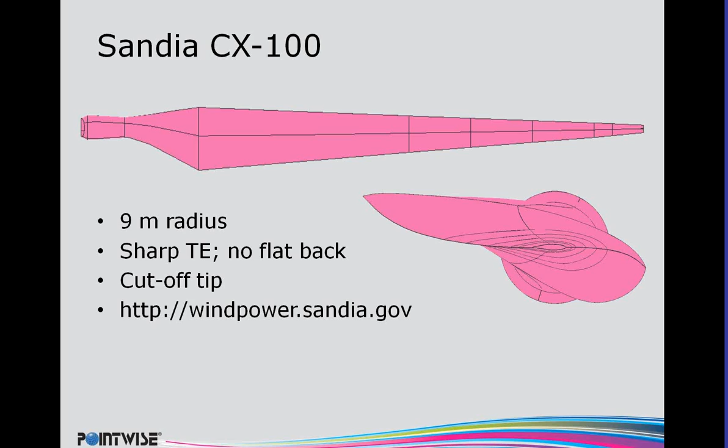So at this point, I'm going to give a little bit of a background on why a CFD engineer would be concerned about meshing on a horizontal axis wind turbine blade. So horizontal axis wind turbines, as we know, generate power through lift. And so efficient designs are going to need to have a low drag. The idea is to get an efficient design, we want to maximize the lift over drag ratio. So we need to look at what factors are affecting the drag on the blade. And so the two predominant aerodynamic drag components in this type of analysis happen in the viscous region near walls in the boundary layer, and also in the wake, where we have some sort of deficit in the velocity. So it makes sense that resolving the boundary layer and the wake reliably and accurately are kind of the key to a successful analysis. So this begs the question, what do I need to do in terms of my mesh to help achieve this?

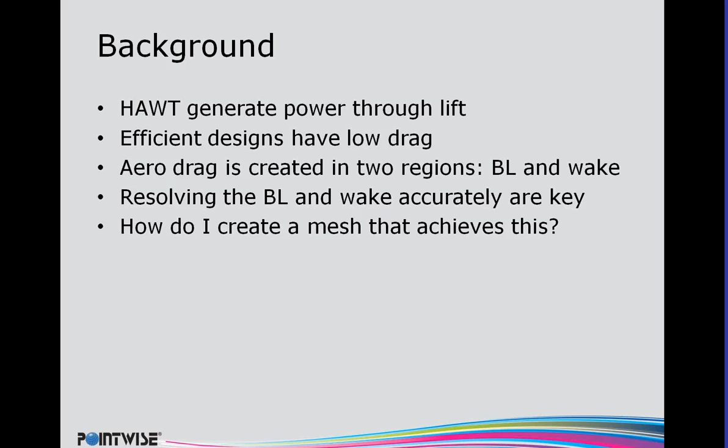So I'm going to back up a little bit and just talk about meshing in general. We can think about meshing from two ends of the spectrum. We have the more traditional structured meshing approach, where it's 100% hex cells, body aligned, point match blocks. It's fairly well known, and over many years of work they've been recognized as generally providing the highest fidelity solutions, but they tend to be much more time intensive.

But on the right, we have the unstructured approach, at the other end of the spectrum, requiring very little time using modern meshing techniques. In this case of the CX100, if we were just doing a fully unstructured mesh, it would literally take just a few minutes to make it. But the trade-off is definitely some sacrifice in the fidelity of the calculations we're doing.

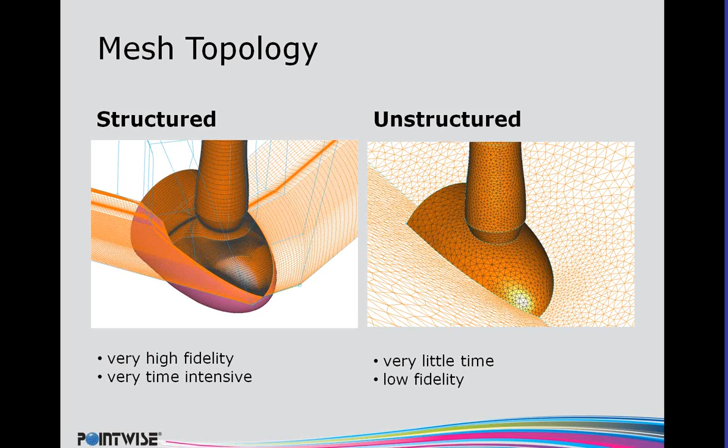So you may have heard this, and I just mentioned before about structured meshes being very high fidelity, and so you may wonder, what is it about a structured mesh that makes it so desirable? I think I can break this down into two key concepts. One is simply point efficiency, maybe the most obvious. I have a very simple problem here, just a back step, showing you the differences.

You can see in the case of the structured mesh, I have about half as many elements, half as many cells as the equivalent Delaunay unstructured mesh. In both these cases we have the same number of points on the boundary, I just generated the interior with a different method. This is further exacerbated in 3D, where that ratio, as opposed to being 2 to 1, is more along the lines of about 5 or 6 to 1. So you get considerably higher cell count.

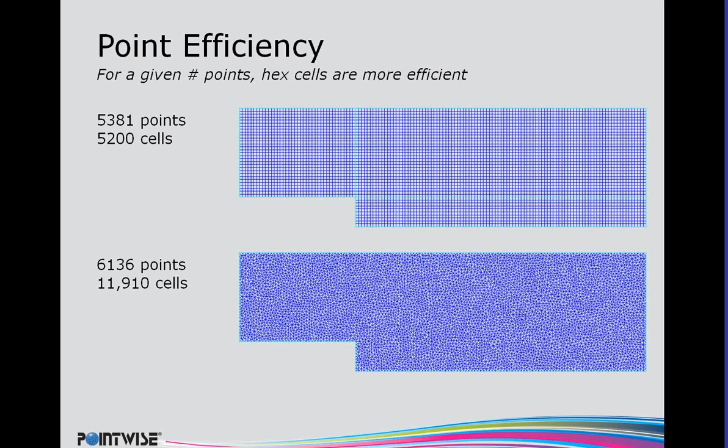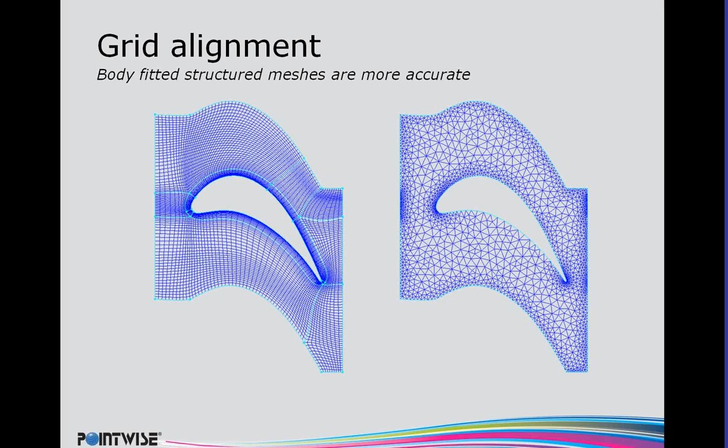Now the second point that makes structured meshing so attractive is this notion of body-fitted structured meshes, grid alignment, aligning the grid with your flow, giving me higher accuracy. That's just kind of a talky way of explaining it. So what is it about this aligning the mesh with the flow that gives us more accuracy?

Just a very simple comparison between the quad cell, the structured mesh on the left, versus the tri-cell, the unstructured mesh on the right. This is simply showing you a flat plate flow. We have no gradients in the streamline direction, and the gradient is strictly in the normal direction. So what I'm looking at here is the Taylor series expansion about the cell center from the cell center to the face.

Why is that? Well, if you look at cell-centered finite volume methods, this is the numerical technique we use to get the values to the face, because we have to do an integration around the faces of the cell to accumulate the values at the cell center. This is a very important step. In the case of the structured mesh, where the faces are aligned with the flow gradients, the truncation error terms in that expansion essentially cancel out, so we have a really high approximation from the cell center to the face.

But not so in the case of the triangle, where there's a remaining delta between the location of that cell center and the face center. It may vary from solver to solver, but the general concept still applies no matter whether it's a cell-centered or a node-centered or maybe some FEA-based algorithm.

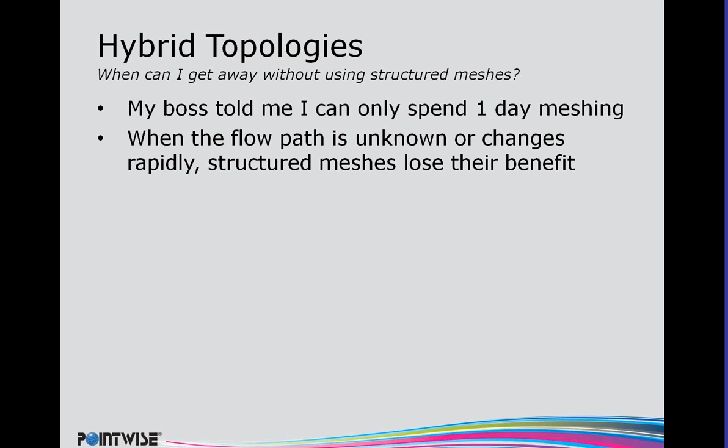So maybe getting back to the discussion about flow alignment, when the flow path is unknown or changes rapidly, in the case of maybe some sort of transient simulation, it would make sense that structured meshes definitely lose a benefit. If we don't know the flow path a priori, it's pretty difficult for us to align the grid lines with the flow.

Another big benefit for unstructured meshes is that they provide a lot more control or flexibility for localized clustering, and we can look at one particular area, pack in a bunch of cells, and that clustering does not affect far away areas. Whereas for a structured mesh, I may apply some localized clustering, but due to the nature of a structured mesh, that resolution control is going to possibly propagate into an area that we simply don't need it.

So getting back to the reason for this webinar today, hybrid meshes are just a good compromise between effort and accuracy. So what we want to do is put a hex, or in the case maybe a prism mesh, where we take a triangulated surface and extrude layers.

Again, definitely better than purely tet mesh. So we want to put these prism or hex regions, zones, in the important regions, such as boundary layers and wakes.

And in the case I'm going to show today, for compressible flows, we all know resolving shocks is important. And for multi-phase calculations concerned with free surfaces, we want to resolve that sharp interface. It's fairly well known that trying to get hex type cells in that region is important. We just put unstructured elsewhere, for simplicity of meshing, away from the flow gradients where it's maybe not affecting the accuracy of what we're interested in as much.

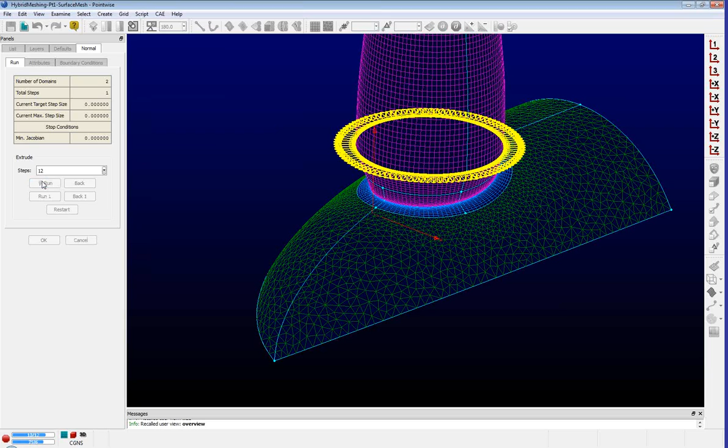So what he's doing, like I mentioned, is creating this collared region at the root of the blade. He's actually going to create a series of grid curves, which we call connectors, and surface meshes, which we call domains, and use those to create a framework by which he can assemble a structured volume mesh in this collar region.

The reason he's going to manually assemble it, as opposed to possibly doing an extrusion, is due to the character of the way the hub and the root of the blade meet each other. So when he gets a chance, he's just going to rotate it around so I can show you from the side.

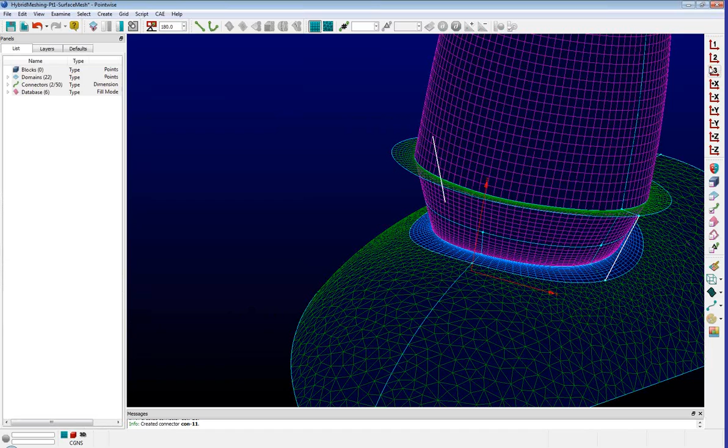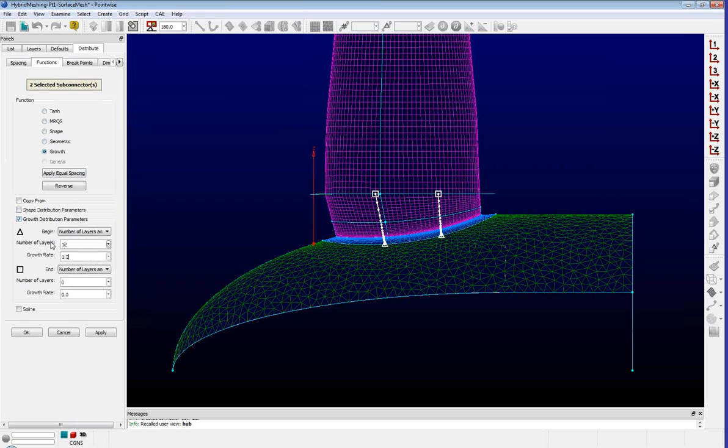You can see on the downstream side of the hub how the distance between it and that surface mesh he created is much shorter compared to the upstream side. So if we tried to create an extrusion with Pointwise to do that, the cells on that downstream side are going to pile up, and it may result in less than optimal cells. So it's best that we manually create that mesh there, so we have full control of exactly what the cells are doing.

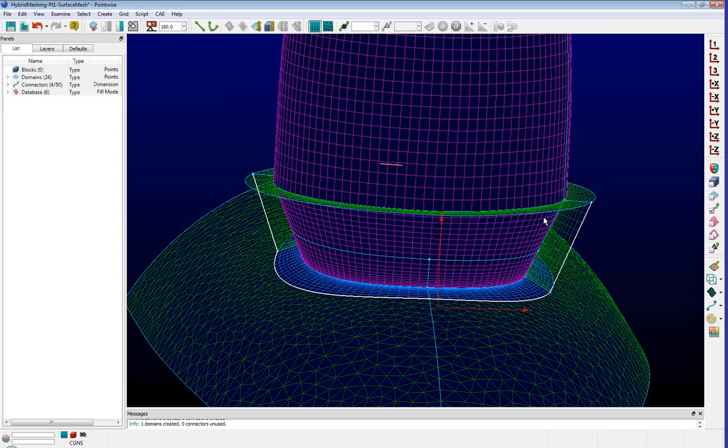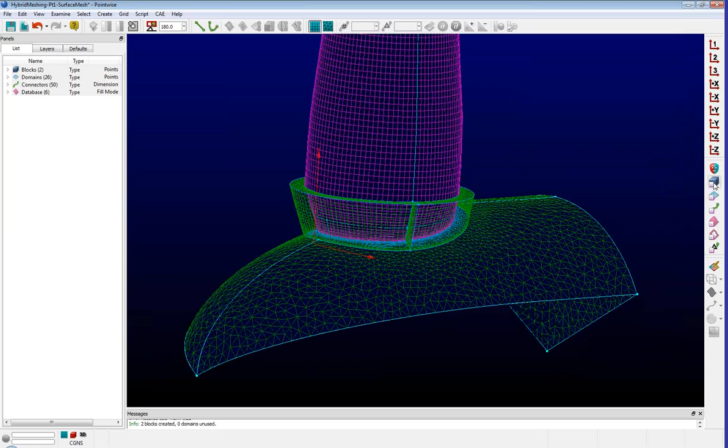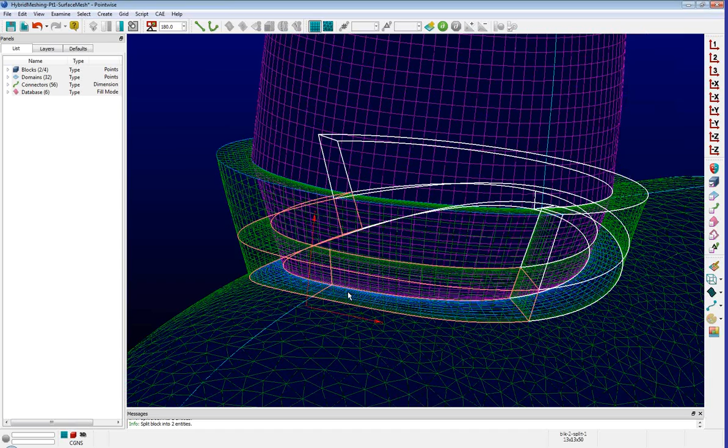Travis is just finishing up this piece here. He just assembled the structured volume mesh. Now, before he leaves this part and creates the prism extrusion on the hub, he's going to split this structured volume mesh into a couple of pieces, strictly to create topology on the outer part of this mesh. He'll use that topology to guide the prism extrusion, so that when it comes up the side of this mesh, it becomes point matched.

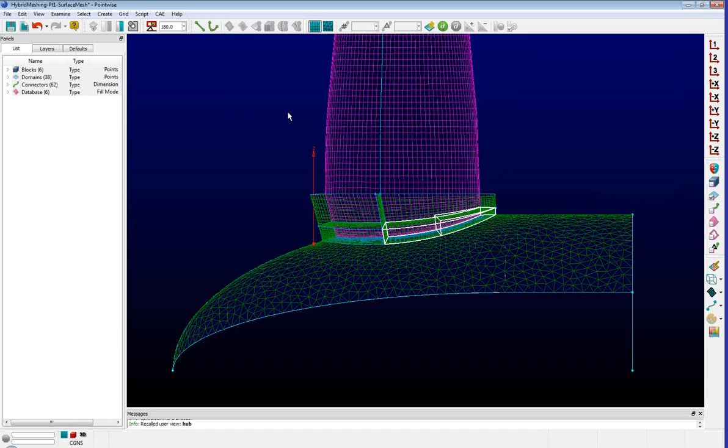I got one question from the audience here from Tony McDaniel. He's asking what version of Pointwise you're using. I'm using the latest available version you can download from the website—version 17.0, release 3.

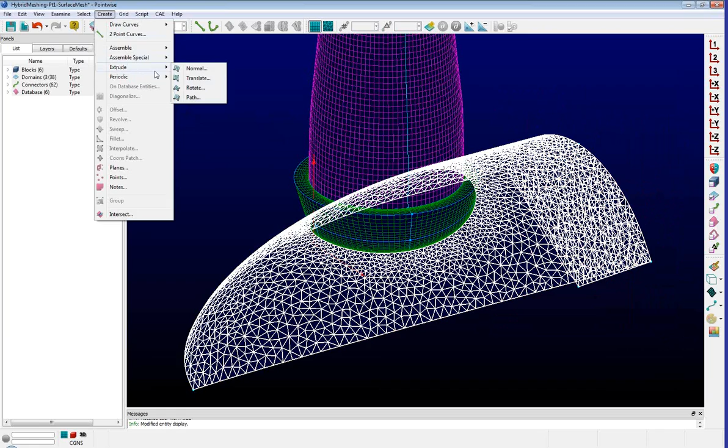Okay, so Travis just finished up the topology splitting. Now he can go ahead and proceed with that prism extrusion from the hub. The first step is he needs to constrain that extrusion both on the sides of the hub, as well as in the inner region where it's going to match up with the volume mesh he created in the first step.

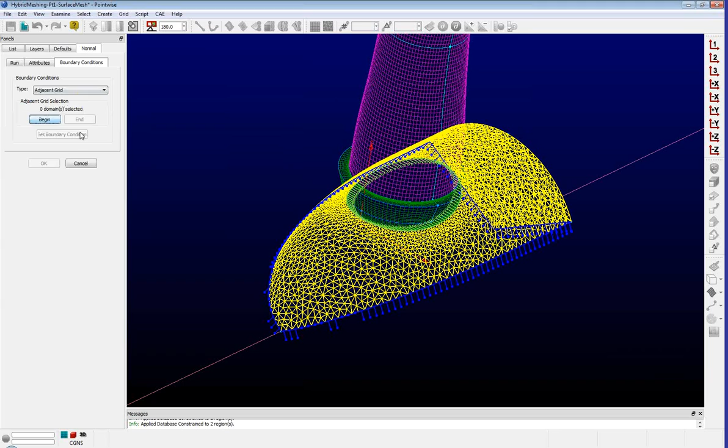Because we're doing a periodic simulation, we're only simulating one of the blades, and there are three. We have this 120-degree sector region. He's ensuring that when this extrusion comes off, it stays constrained to these periodic surfaces that exist in the geometry. The last step is to constrain the inner edges of this extrusion so they match the structured topology he created during the block splitting, so that when the extrusion is finished, its edges are point matched with that inner structured volume mesh.

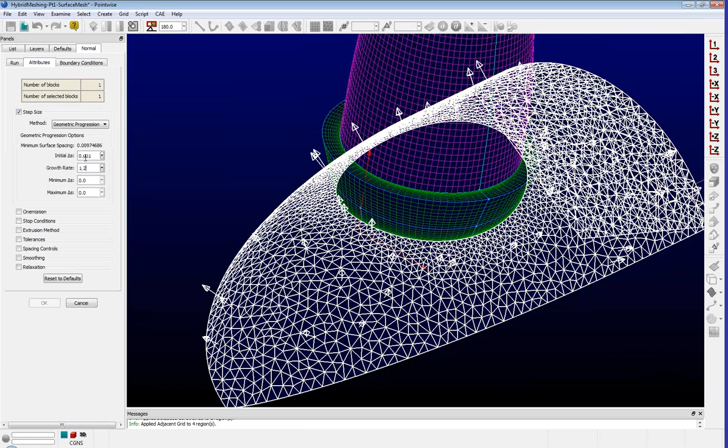So I'm going to let Travis finish this up. I have another question from the audience—Derek Alexander asking, how did you define the structured curve in the hub?

At the very beginning, before Travis had started, we showed that surface mesh with a nice structured-looking mesh that was a ring around the base of the blade. All Travis would have done is take the connectors—our terminology for grid curves—and done a 2D domain extrusion that would be database constrained to the hub. Then he would use boundary layer parameters like the ones he's using today: a delta S of 0.001, a growth rate of 1.2, and 12 layers in his boundary layer.

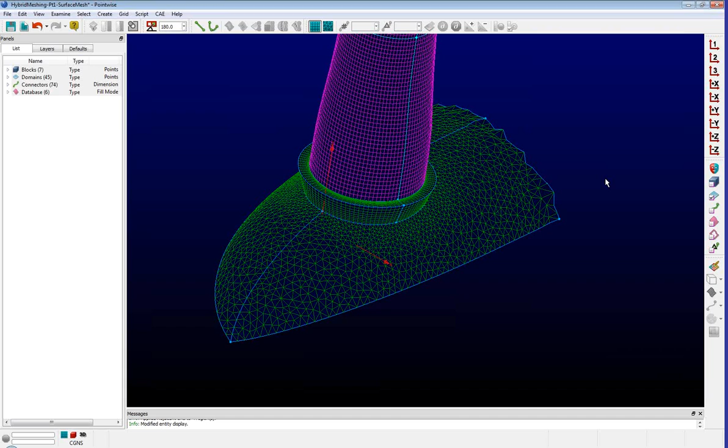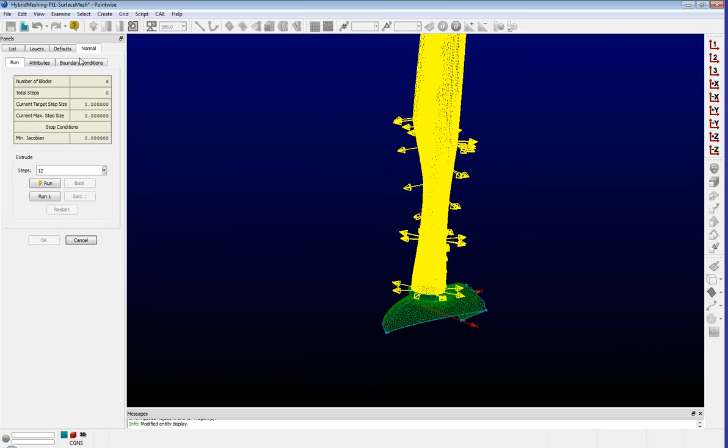Okay, so now Travis has finished the prism extrusion on the hub itself, and he's going to use a very similar process for doing the extrusion on the blade. While he does that, I'll give a brief explanation of the differences between doing an extrusion with a structured domain versus an unstructured domain.

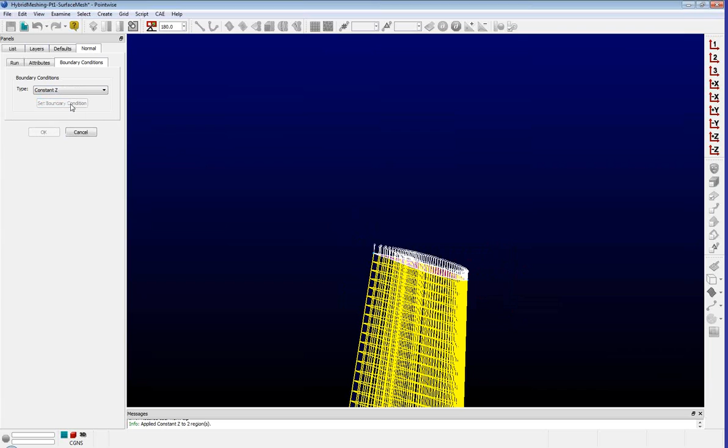First, the most obvious difference is that you end up with a hex volume mesh instead of a prism volume mesh. By default, when you do an extrusion with a structured domain, creating this structured volume mesh, it defaults to using the hyperbolic extrusion technique. The benefit of the hyperbolic extrusion technique is that it's equation based and has smoothing automatically built in, so that when it creates the volume mesh, it makes a very smooth and very orthogonal mesh.

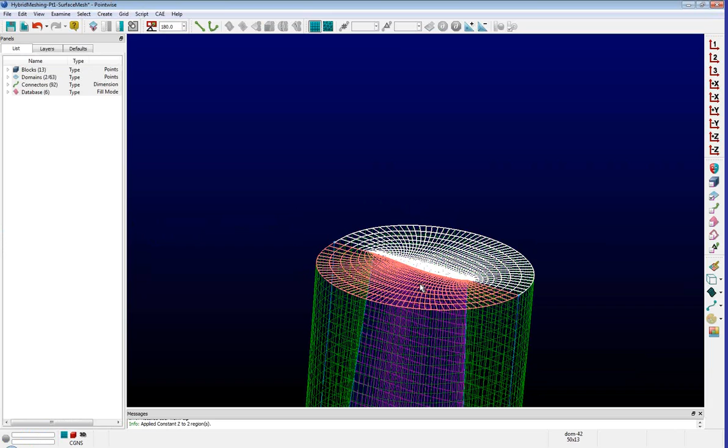Travis is going to show that here in a second when he gets finished—he's just going to select those to highlight it. Zoom in a little more. So we can see this is the end of that extrusion at the blade tip, and the grid lines emanating normally from the blade are very orthogonal with the blade, while all the circumferential lines are very smooth. This creates a very high quality boundary-layer-resolved mesh.

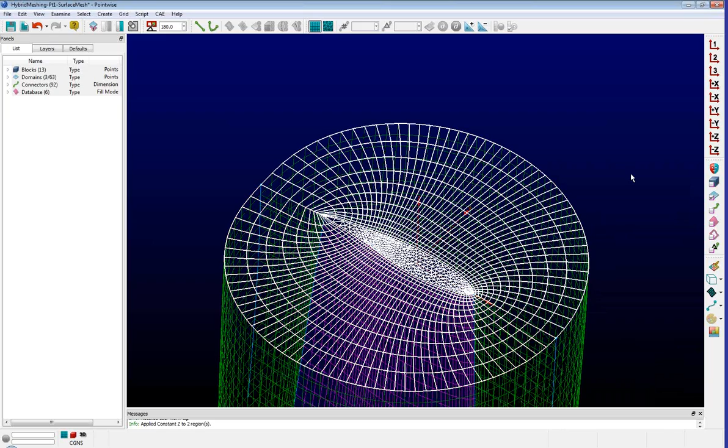To finish that up, at least the part around the blade, he's going to do a translation extrusion from the tip, so that we can have better quality cells in the tip that help us resolve the tip vortex.

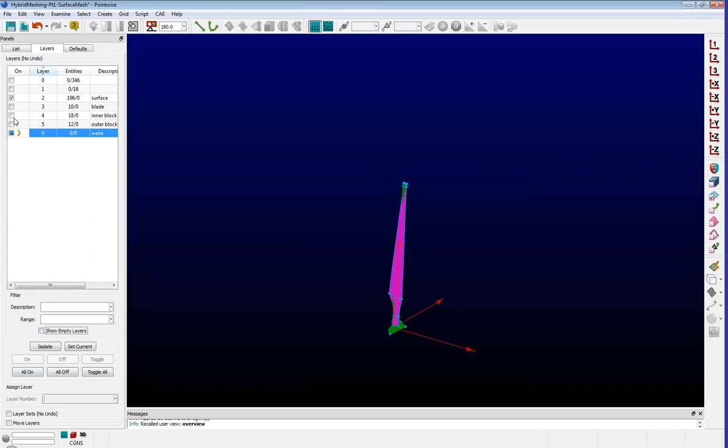I'm going to answer a few more questions from the audience before we move on. We got a question from Ozer Aydin, asking would the mesh be ready for Fluent when we're done? Absolutely, this is a mesh that's very amenable for doing analysis in Fluent.

Got another question from Hin Fan Lao, asking about whether you can control clustering in the unstructured mesh. Let me expand this question a little bit, I'm missing some of it.

Actually, Travis is going to move on to the part where we create the wake region behind the trailing edge of the blade, and he's going to show some techniques for changing the resolution in the unstructured mesh. So I'm going to let Travis start creating some grid framework. What he's going to do is create a circular sector region in the wake behind the trailing edge of the blade, which he'll use to create some wake resolution using prism cells.

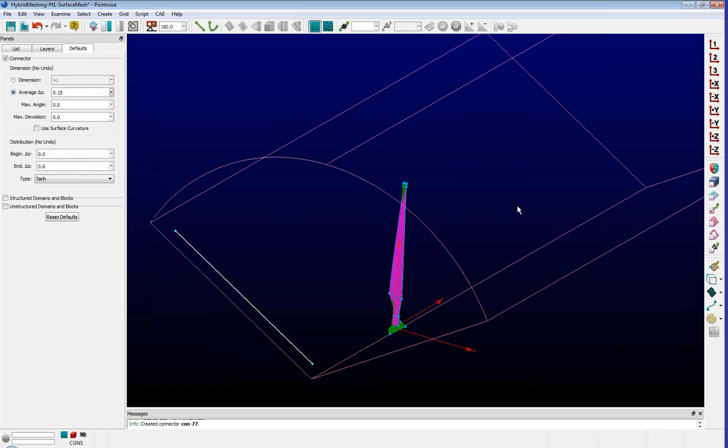I have another question from Tony McDaniel, asking was the tip mesh unstructured? Because Travis began with two domains there - a structured domain and an unstructured domain - but did a translational extrusion. So from the structured domain, the resulting block would be hex, and from the triangular domain, the resulting extrusion would be prism. So it would technically be another hybrid where we have a hex block as well as a prism block.

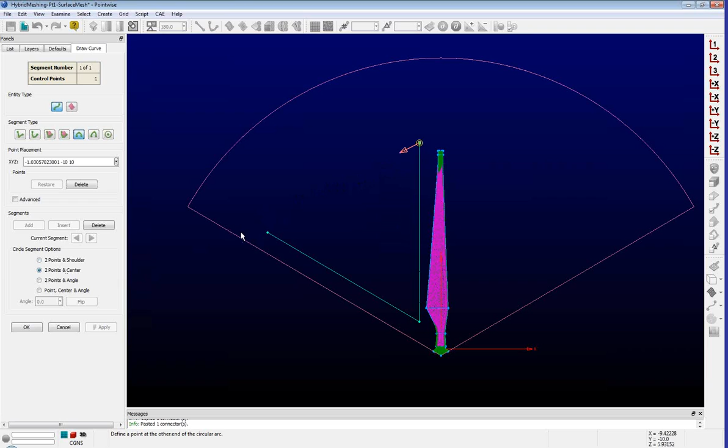I got another question from Swati Saxena: did you use a database file for reading the geometry for the hub and the blade? I'm not sure if I'll answer this quite right, Swati, but there is a single geometry file - an IGES file that we used for this - and that contained not only the hub and the blade, but also the geometry for creating the far field.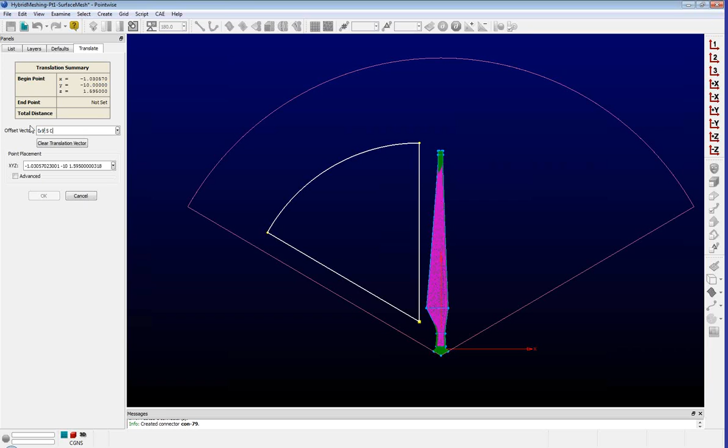So I'm going to catch up to Travis here a little bit. Now you can see he's created these three grid curves that are defining this circular sector region. Just for simplicity, Travis has gone ahead and assembled an unstructured domain in this circular sector region. The reason he did that was just for simplicity - it's a balance between time and effort.

Somebody could ask, well, I would really prefer to have 100% hex cells in the wake, and that's absolutely fine. If that were the case, an alternative approach might be to use more of a rectangular looking topology instead of this circular sector region. But it would just take maybe 5 or 10 minutes more, as opposed to Travis literally doing this in about a minute or two.

Before he does the prism extrusion to create this wake block, he's going to change the resolution of the points - he just added a lot more points in that vertical connector in the wake region. This may address the question about how you could control the clustering in the unstructured mesh, done by increasing the points along that connector. In this step, he's changing the end spacings of the adjacent connectors so we have a smoother transition in that corner region.

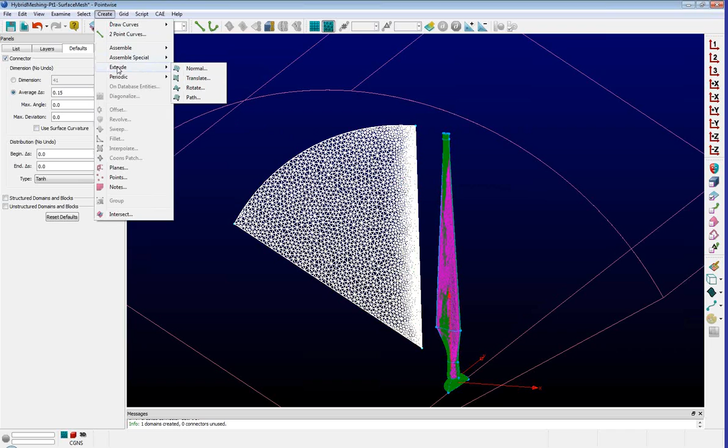So now that we have this unstructured domain, it's just a matter of doing translation extrusion again to create this prism block. I'll let Travis go ahead and do that.

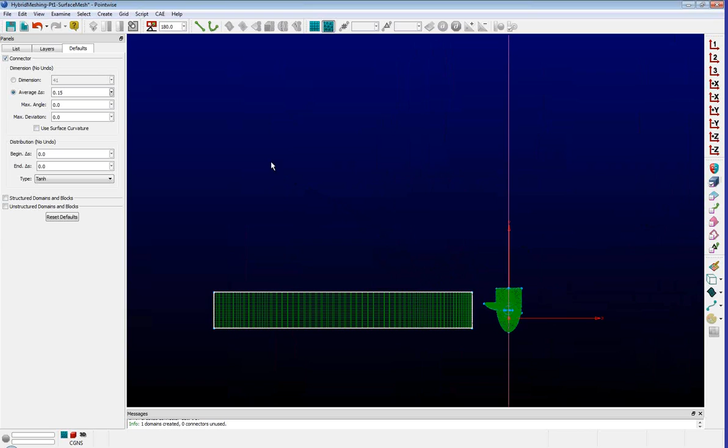Just before we finish off with this wake block, Travis is going to do one more operation where he'll grab this wake block and rotate it about the axis of the blade.

So you can see he's going to change it, he rotated about 10 degrees. So he rotated it clockwise 10 degrees. And so why did he choose 10 degrees?

The way we determined 10 degrees is just to look at the actual tip speed ratio. Tip speed ratio, for those of you who don't know, is the ratio of the velocity of the tip versus the incoming flow. In this case, if we were to do the analysis, we would be using a tip speed ratio of 5. And so just using some basic trigonometry, the resulting function would be the inverse tangent of 1 over the tip speed ratio. Doing that, we come up with a value of 10.

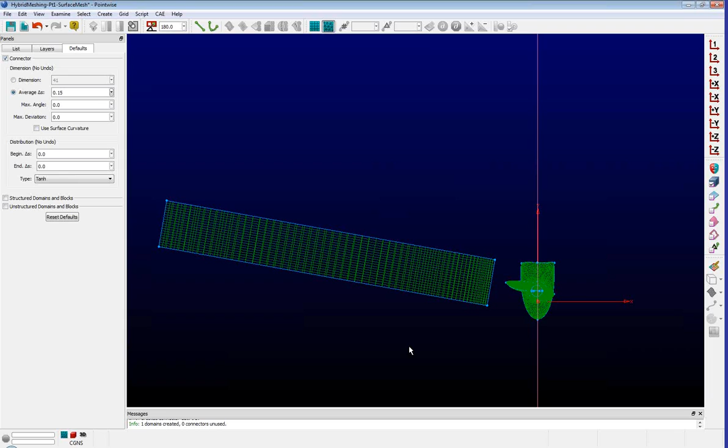Now, it's not exact, but at least it better positions our wake block where we anticipate the actual wake to be, so we can better position that. And because we have a lot of flexibility with the position of the block, that's the benefit of doing the hybrid technique - we can create these higher quality meshes where we want them and not be constrained by the outer topology, which he's going to show next, and how we can allow this to float.

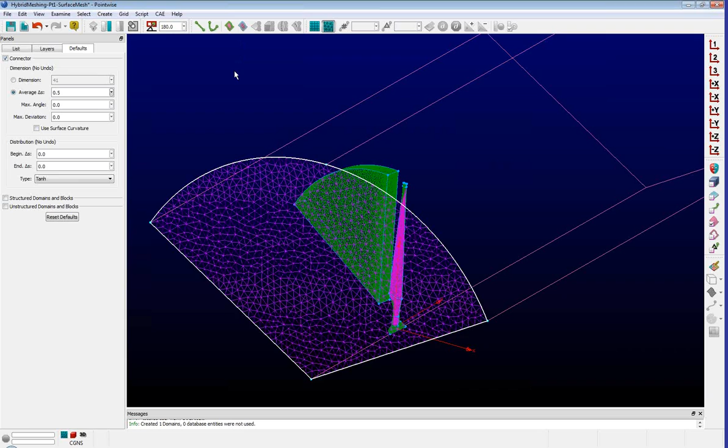So we've done the high quality meshes in the boundary layer, and we've done the high quality mesh in the wake. Now Travis is going to create the framework of connectors and domains that he's going to use to create this unstructured block that's going to wrap around all this. This is going to take him another minute or two, just some fairly basic operations in Pointwise.

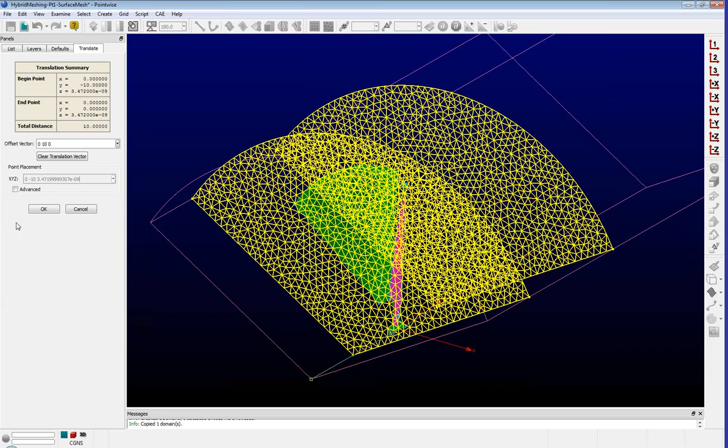So I want to take this opportunity and maybe answer some of the questions that have been queued up.

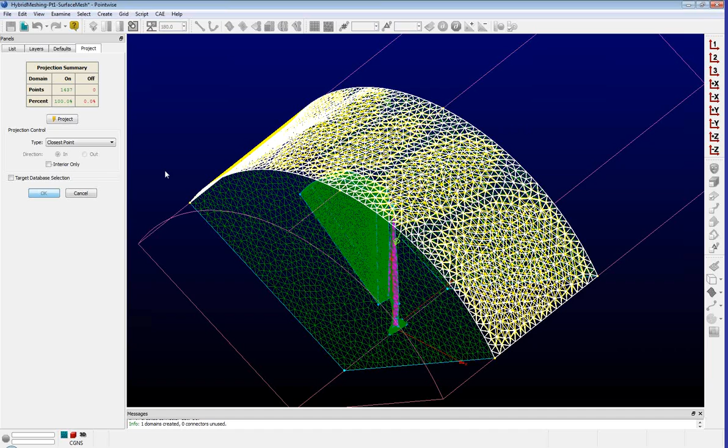One question from Gridar - excuse me if I mispronounce your name - he asked, can we use the hyperbolic tangent variation while extruding in the normal direction? Yes, absolutely. By default, the facility for doing extrusions uses a geometric progression where you specify a delta S and the growth rate. But the way to do non-geometric type distributions is you can create a connector with whatever distribution function you want, and then use that connector to drive the spacing, the growth rate, and the actual extrusion itself. There's an option in the normal extrusion panel that lets you toggle between geometric progression versus using a connector to drive the extrusion.

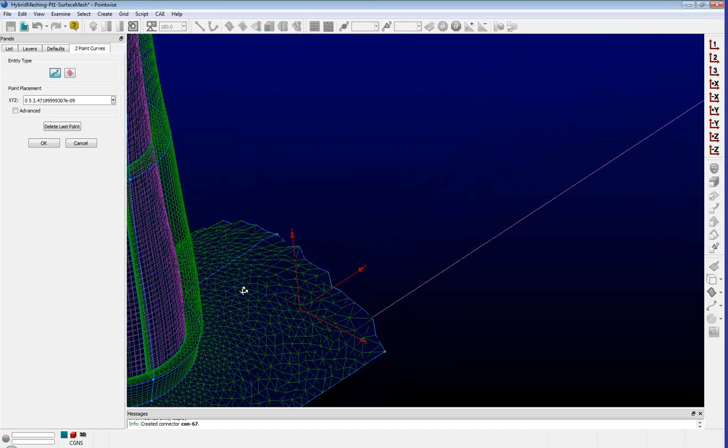Another question from Dorit Sobata: what is the maximum aspect ratio recommended for domains interfacing with structured and unstructured volume meshes? That's actually a really good question, Dorit. When we get to the point where we catch up to Travis again, I'm going to highlight some of what goes on with this interfacing between structured and unstructured meshes.

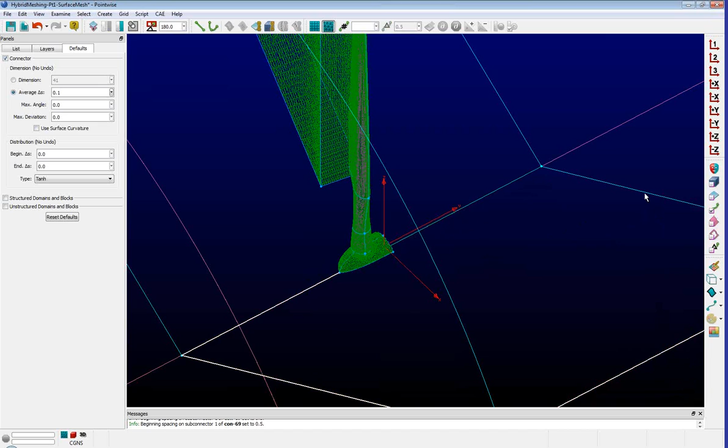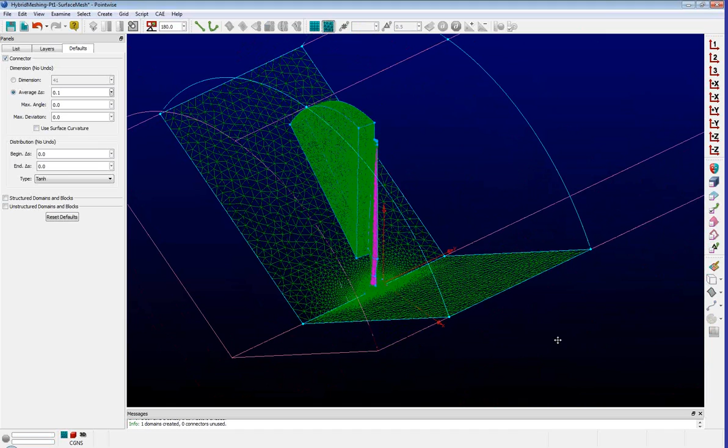Pointwise will automatically insert pyramids, so you have to be a little careful with what's going on at the interface. If you have these high aspect ratio quads, Pointwise is going to automatically place a pyramid on top of that. If that aspect ratio is too high - if you can't visualize it, just sketch it out on paper, draw a regular pyramid on top of a high aspect ratio quad - and if that aspect ratio gets too high, you end up with triangular faces that have a very high included angle, and high included angles are a good indicator that you're going to end up with some poor quality cells. It depends on the capabilities of your flow solver, but at least for me, just a general suggestion: I try to keep my quads that I'm going to be interfacing to a TET mesh with about 10 or below aspect ratio. That's just from my experience creating high quality meshes at that transition region.

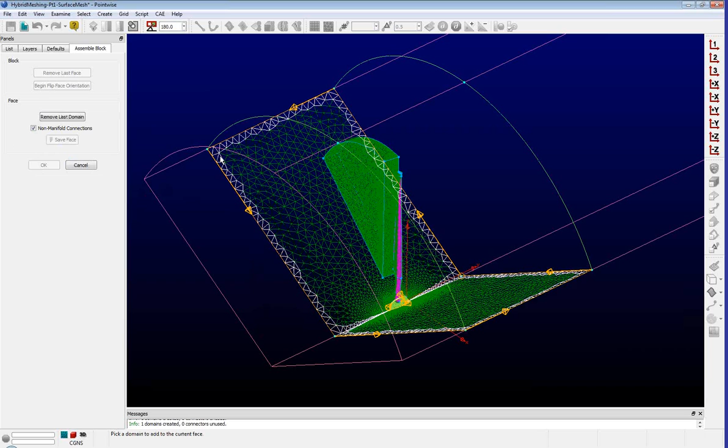All right, so Travis finished creating that framework of connectors and domains, and this is really the key to this whole hybrid meshing technique in Pointwise - the ability to create an unstructured volume mesh that can interface, like the question I was just answering, with structured domains on the boundary. So what Travis is going to do is create this unstructured volume mesh, what we call a block, and he's going to include not only these unstructured far field domains, but also the outer part of that extrusion on both the hub and the blade, where those structured domains occur. Then, as he goes through and does this, he's also going to add the actual prism block itself.

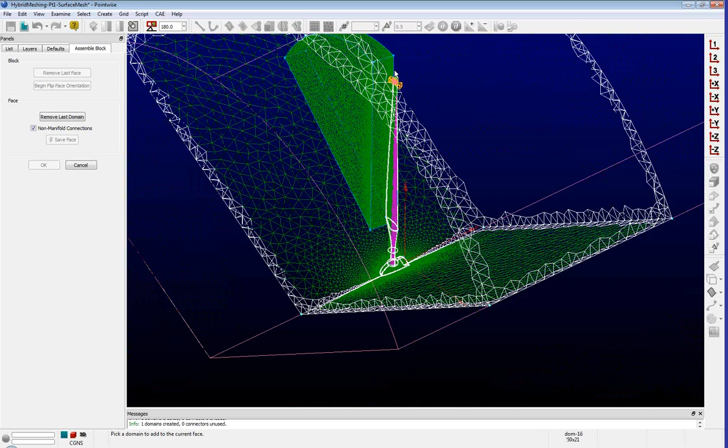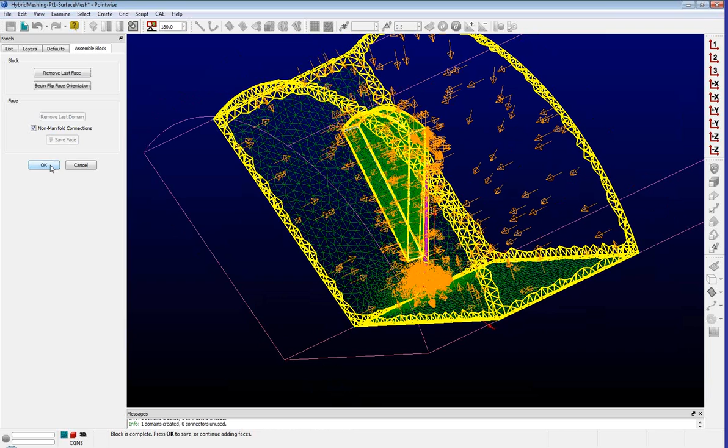Because the prism block is kind of free-floating in space, we add a second face, which essentially subtracts the volume of that prism block since those cells already occur there. There's no reason to recreate them, so this is how we envelop that prism block in the unstructured volume mesh. Now he's created the block.

So what he wants to do now is go into the block solver, and the reason I want to go into the block solver is to show you what Pointwise does when it interfaces unstructured blocks with structured domains that have quad cells. He's going to go in at this junction between the collar volume mesh at the root of the blade and the prism extrusion.

You can see Pointwise will, in this block solver, render the outline of the pyramids - you can see them in that light gray color. By default, Pointwise uses an aspect ratio of 0.5, which dictates the height of the pyramid. In this case, the apex of the pyramid at this junction is actually piercing through the outer part of the prism extrusion on the hub.

That's a bad thing, because if we try to initialize the volume mesh, Pointwise is going to complain that there are some intersecting surfaces. So this is just something to be aware of when you're doing these kinds of meshes.

So Travis is going to change the aspect ratio to a lower value, and you can see he brought down the apex of the pyramids so we don't get an intersection. This is something you have to be aware of manually right now with Pointwise, but in the next major version releasing later this year, this pyramid cross-checking will be automatically done, and you won't have to worry about manually backing off the heights of those pyramids.

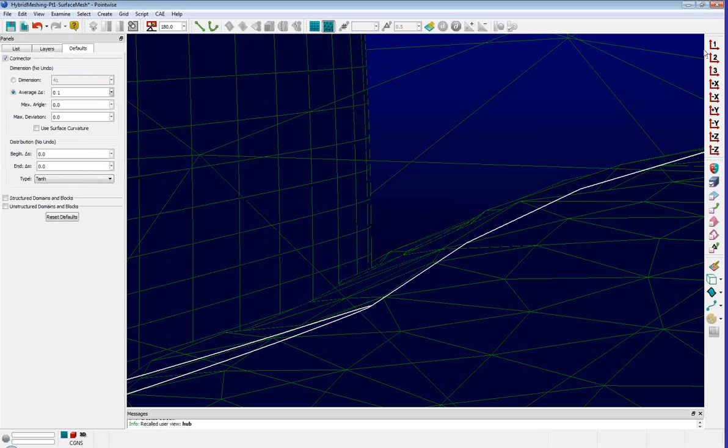All right, so Travis is now going to do the last few steps for creating the mesh in the near field. He's just going to take the unstructured domains in the front and the back and create prism blocks, again for simplicity and also for reducing the cell count, upstream and downstream of this.

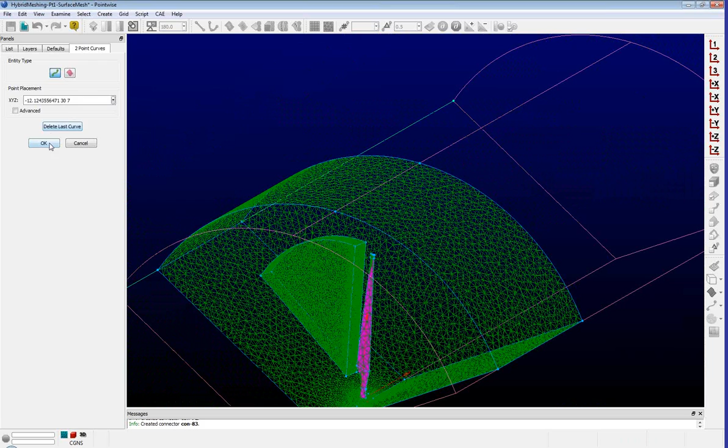So I've got a question: how does Pointwise specify the boundary condition at the structured and unstructured interface? Again, this is from Swati.

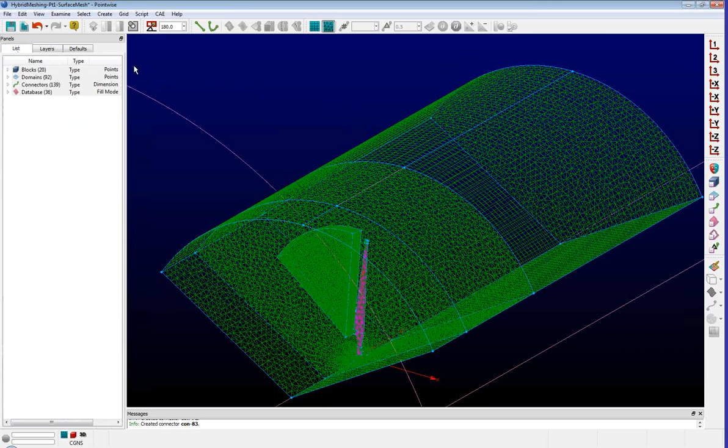In that case, Swati, because the structured and unstructured volume mesh is going to be point matched, that interface is actually kind of an internal domain, and by default that's part of the internal volume mesh. So when you export this to your CFD solver, you export that volume mesh. There's no need to actually specify a boundary condition there because it's just going to be contained as part of the volume mesh.

So again, I'm going to catch up with Travis here a little bit just to cap off what he's done. The last step in this case is to create the outer far field that's going to wrap around the near field. This is just some fairly basic Pointwise operations - he's going to use a fully unstructured mesh, again because this is far field.

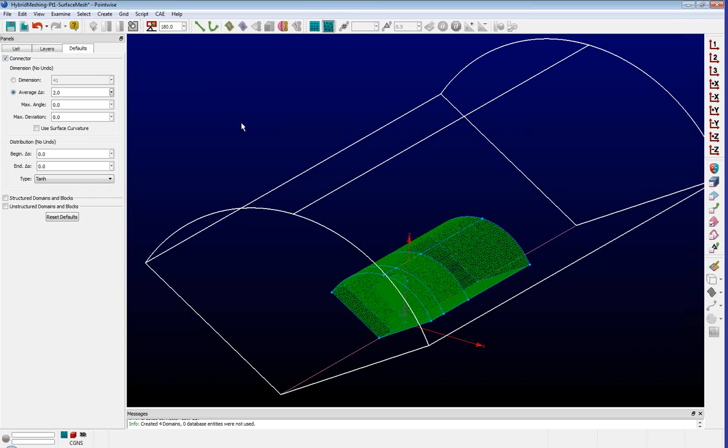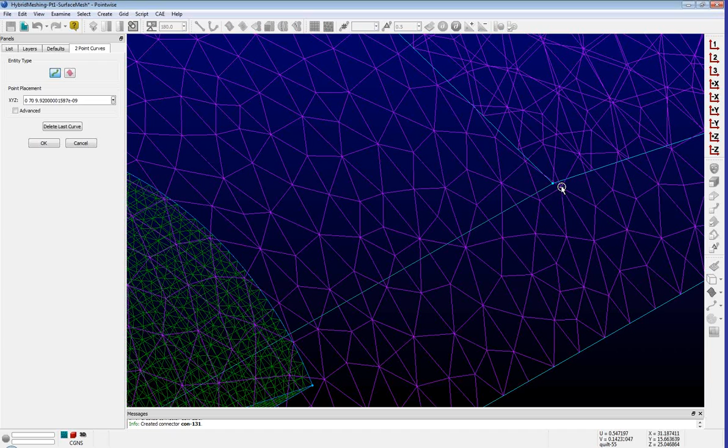The reason he's creating this separate far field region is that ultimately we want to possibly do two types of simulations with this. We want to do a moving reference frame simulation where we solve the near field in a rotating relative frame, and then do the outer region in a fixed frame, or we may want to go all the way and do a transient simulation including the entire geometry. In that case, that would simply be a matter of copying and rotating the volume meshes twice to get the full wheel.

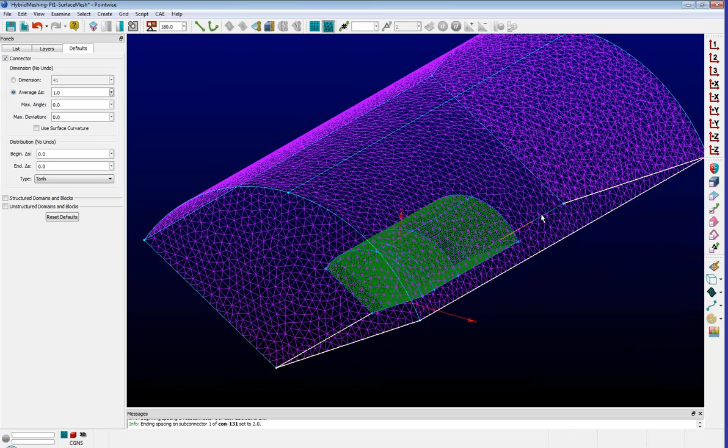So I got a question from Robert Moody: what options do I have if the geometry comes in as, say, 1,000 surface pieces of questionable connectivity, size, aspect ratio - maybe there's some slivers and such? Do I need to clean up problems, or is there a quick way to determine if it's good enough without modifications? It's actually a really good question, Robert.

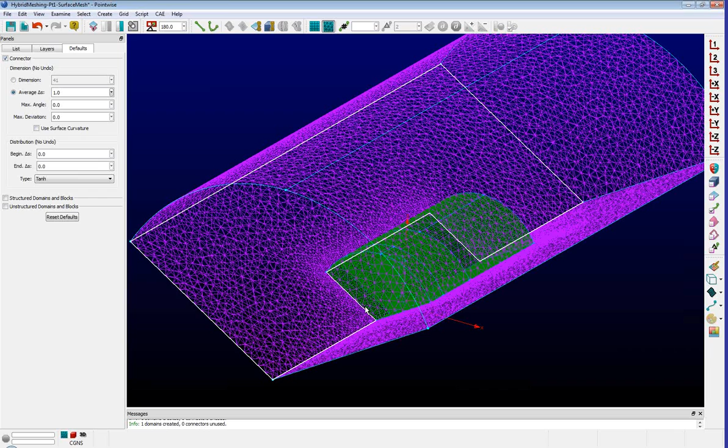Actually, our last webinar was dedicated to that question almost entirely - how to clean up geometry in Pointwise. In general, I'll say there are two ways you can do that. Yes, you can go ahead and clean it up and make everything watertight, but that's not a requirement to meshing in Pointwise.

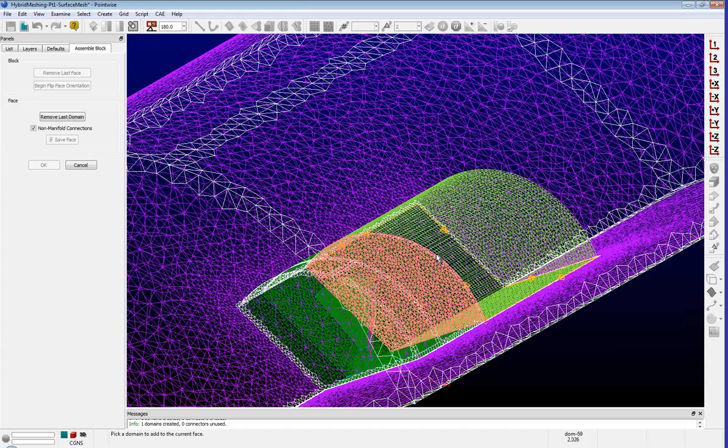The alternative is to leave the geometry as is, create a mesh on top of that dirty or sloppy geometry, and then we have tools for actually cleaning up the geometry itself. Neither of those methods are mutually exclusive—you can use a little bit of one or the other. I'd definitely refer you to our last webinar, two webinars ago, where we covered some of those topics on a naval application.

All right, so Travis just finished up, he's all done. Before we finish here, I'd like to show you what the internals of that volume mesh look like, just to give you a feel for what things look like inside. So Travis is going to open up the volume mesh in examine mode, look at some sort of examine metric, and take a slice down the axis of the whole mesh, just to give you a feel for what's going on, where we have these coarse, large tet cells in the far field.

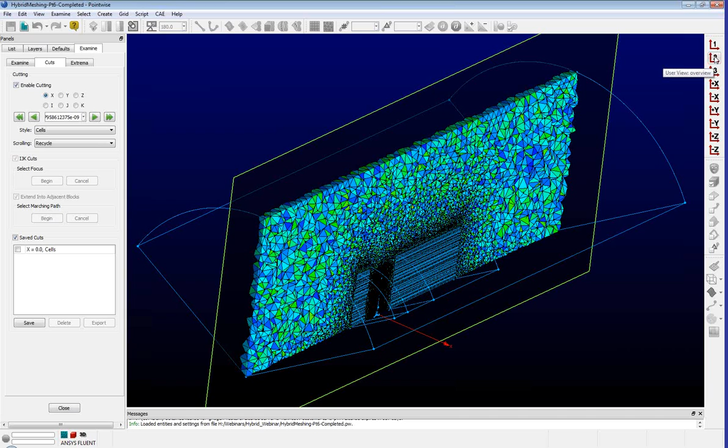In the near field region where he did those prism extrusions upstream and downstream, you can see those prism cells. If he zooms way in, you can see the resulting extrusions from the hub, as well as that collar region and the blade, and how it transitions nicely and smoothly away. So we have these smaller tets that transition nicely with the hex cells. At this point, Travis is done with the volume mesh—other than setting boundary conditions and volume conditions, this is essentially ready to go into the actual solver.

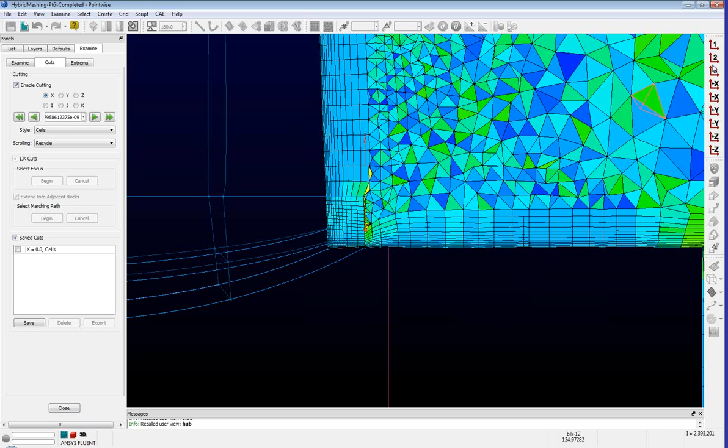Pointwise is 32 and 64-bit on the 3 platforms we support: Windows, Linux, and Mac. I've personally created a mesh recently, we were just doing some large grid testing. On a single workstation, our software is single-threaded, so it's not parallelized. I've actually done a 1 billion cell mesh, and the node count is probably on the order of about 200 million nodes. I did that on a single desk-side workstation that had 90 gigabytes of memory, so pretty much the sky's the limit. You can probably make meshes in our software bigger than you can afford to buy hardware for.

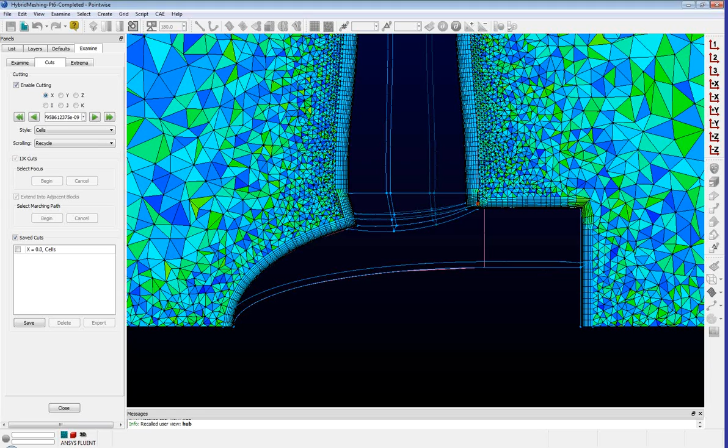There's a non-dimensional value engineers in this field use called the tip speed ratio, which is the velocity of the tip when it's rotating divided by the axial incoming flow. That's called the tip speed ratio.

But as that incoming flow magnitude increases, we know the wake more and more is going to get pushed in the axial direction. So we're just trying to guesstimate where we think the wake is going to be. Using the tip speed ratio and some trigonometry, I worked it out to be the inverse tangent of 1 over the tip speed ratio, which gives you that value of 10 degrees.

All right Chris, there's one more verbal question from Mohammed Arifin. Mohammed, you had a question? Yes, hello? Yes, go ahead.

I have just one question: if the interface is somehow not one-to-one in ratio or space, is there any other way to solve the problem at the interface? I mean, what do you do if there is a hanging node?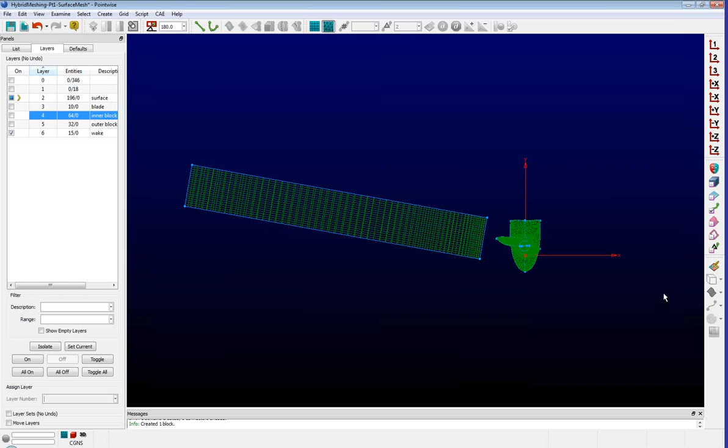Lots of flow solvers have this thing I've heard termed general grid interface. If you had that capability, it's absolutely possible to have a non-point-matched blocking. If that's a capability and you're comfortable with the accuracy it delivers, that may be an even more flexible way to do these kinds of meshes.

All right Chris, another—well, no, it went away. Okay, there's no verbal questions right now. Okay, so I got a couple more.

I got one: please display the azimuth wake region behind the trailing edge of the blade and the wake block. That's from Ed Vaughn, so I'll just let Travis do that while I answer some other questions.

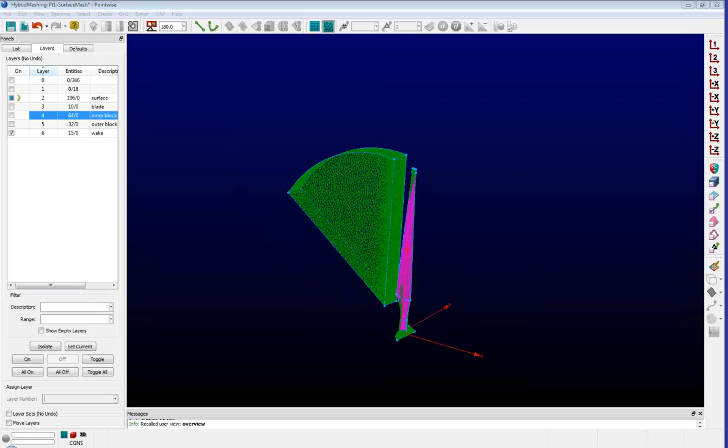Got a question from Kelly Londenberg. Will parallel mesh generation be available in a future release? If so, how far in the future?

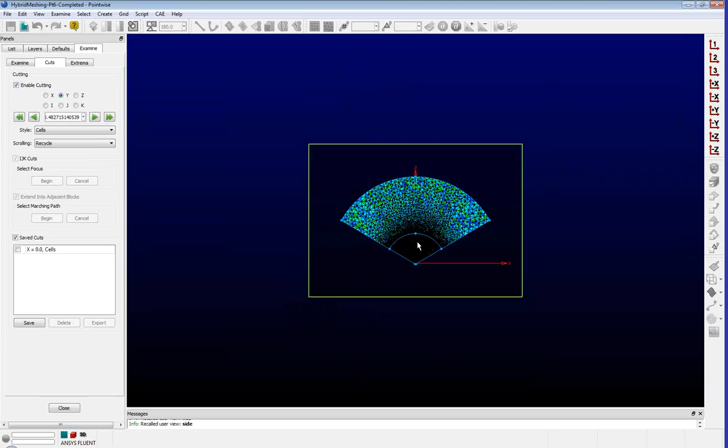That's a pretty tough one to answer. All I can say is we're definitely talking about it. We don't have anything on the books or planned, so I can't comment on an actual future date. But maybe this is a good chance for me to comment on the performance of Pointwise.

For structured meshes, Pointwise is extremely fast and very memory efficient. You can do absolutely huge meshes on the smallest workstation. Now unstructured meshes tend to be a little more memory intensive and compute intensive, but in general it's pretty fast.

Let me give you a better example. One of the customers I work with on a relatively regular basis, we do fully viscous unstructured meshes on the order of about 150 to 250 million cells. That's maybe 60 or 70 million points. And I can do those on a desktop workstation in an hour to an hour and a half. That's fully unstructured.

So it's fairly fast. If you take these unstructured meshes here, which contain 5 million cells, you can populate the blocks with those TET cells, and depending on your workstation, a rough figure is 5 minutes. If you've got something fast, it'll be literally just a couple of minutes. So doing unstructured is still very fast.

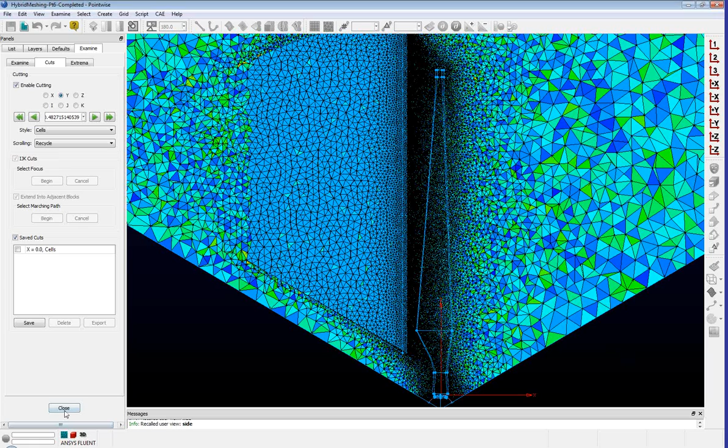I have a question from, excuse me, I can't pronounce your name, but I'll just ask the question. So can I use the T-Rex technology in this case?

For those who don't know, our T-Rex technology is actually just a shorthand name for anisotropic tetrahedral extrusion. Basically it's a fully unstructured viscous boundary layer meshing technique. Now that capability in 3D is not available in Pointwise right now. It's in our older product, GridGen. Our license allows use of either one.

So getting back to the question, can we use this technology in this case? Yes. We actually have some literature on our website. If you go to the T-Rex page, there are actually some images of a mesh I did on this exact geometry using the T-Rex technology.

T-Rex, I believe, yes. This kind of goes along with the last question. Version 17, our version coming out later this year, feature complete with GridGen, will have the T-Rex technology. So you could technically do this fully unstructured with automatic boundary layer extrusion off whatever surfaces you want, and it even has the option to recombine those TETs back into prisms in the boundary layer region if you want.

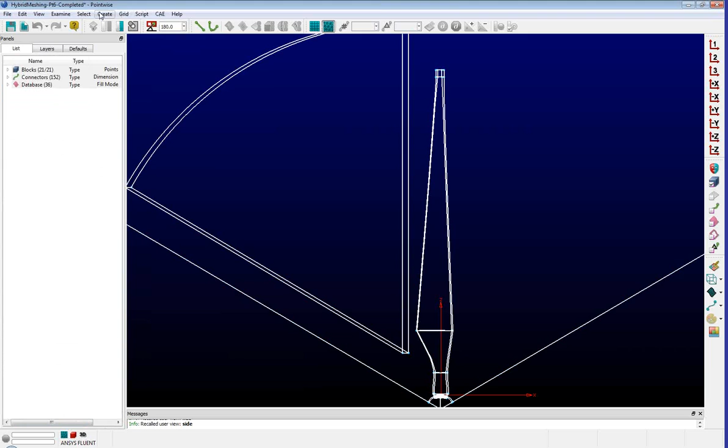Again, we just did that for ease of meshing. Now it's entirely possible to actually create that wake region completely attached to the backside of that boundary layer extrusion off the blade. We could have maybe extracted some topology off the trailing edge side of the outer part of that extrusion, and then made it point match with the wake block itself. Now again, that requires a little bit more manual intervention, but it's absolutely possible.

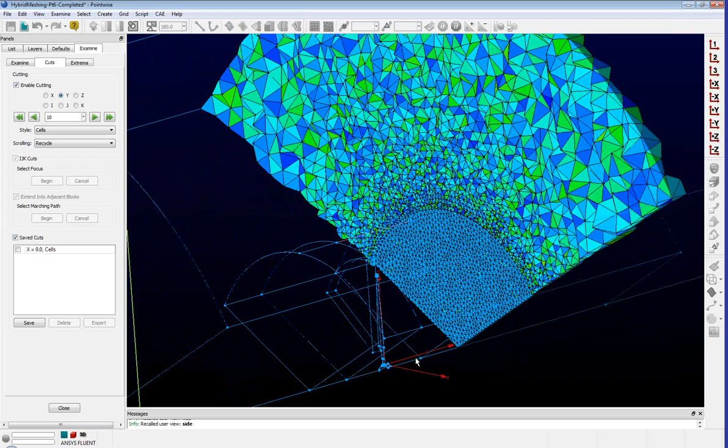We just did it this way because it's a little bit more flexible, maybe because if we were looking at different tip speed ratios, we may be able to automate the repositioning of that wake block. Again, just for demonstration purposes, that was the quickest way for us to do it. But I think the other approach would be even better, because then you would totally eliminate the TET cells in that gap region between the trailing edge of the boundary layer block and the wake block itself.

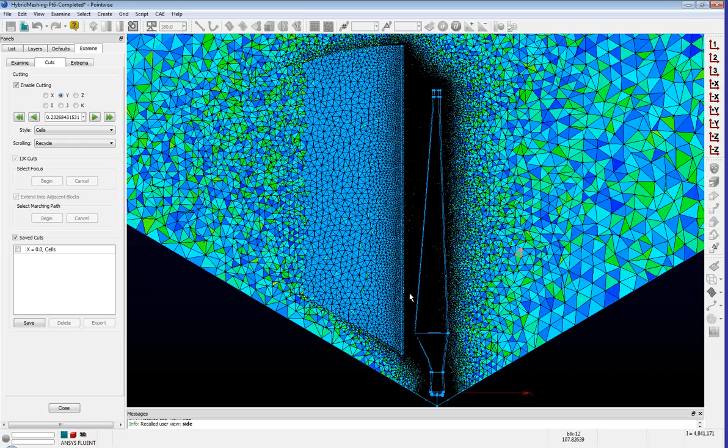I mean, that's a good question. Really that boils down to what you're trying to achieve in terms of accuracy. Again, we created a very simplistic shaped wake block, first of all.

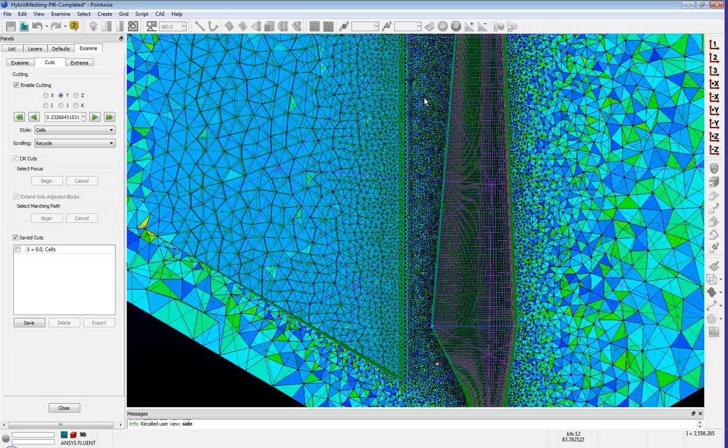So if you think it's too far away, or you don't like the fact that there's TET cells there, I think like the question I just answered about attaching it, that might be the better approach, in terms of still using a hybrid technique, but eliminating all the TETs in that important wake region, because that's where there's a velocity deficit, and this is all about reducing the pressure drag in that wake region.

So that's definitely possible, and you could even go one step further, like I mentioned early on, as opposed to creating this unstructured circular sector region and creating a prism block. Maybe, and I'd say it's probably 15 to 20 minutes, you could create a structured domain instead, and then create this block in the wake that's point matched to the backside of the actual boundary layer extrusion.

We got a general question about what maximum cell skewness do you recommend for high quality simulations? Oh, that's a very loaded question. It really depends on the sensitivity of your CFD solver. Some of them tend to be very robust with poor quality cells. And again, skewness is actually defined very differently in different types of flow solvers.

There's also different types of skewness. I know from experience with Fluent, one of its measures of skewness has to do with how far the shape of the cells is from being isotropic. I think Fluent recommends trying not to have any, or very few, cells over a skewness of 0.9.

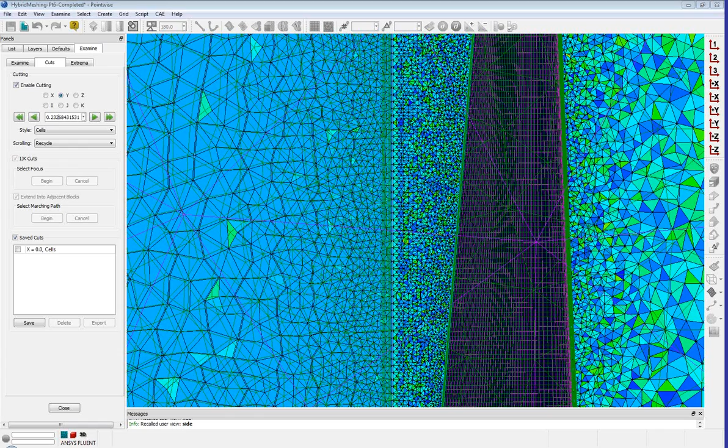So creating a block is essentially taking these domains that comprise a watertight surface mesh, and a block is essentially that watertight representation of those domains. Then as a second step, and this is only necessary for unstructured blocks, you have to populate that block with TET cells, which is a second step where you actually have to, what we call, initialize the block.

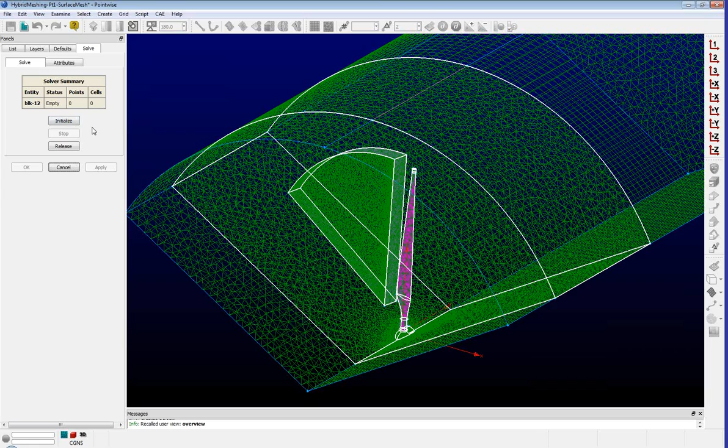The reason we do that is because it's possible your TET mesh has a lot of cells, so you can create this block empty, and then as a second step when you're ready to populate it, because if you have 100 million TETs, it may take an hour, so maybe you want to do it at a later time. Also, it's a compact way to cut down on the actual file size. If I'm not going to be using this mesh for a while, I can empty the block so it has no cells, but the block is still there, and I save the file, archive it, and later just click that button to repopulate the block. So that's a concept specific to our software.

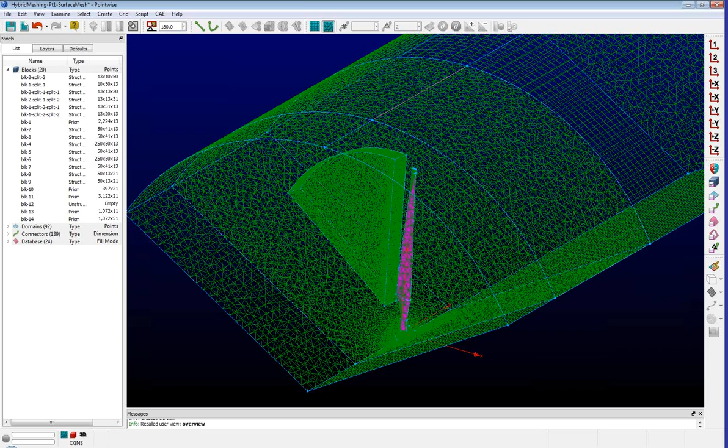It's from Henry Vu. He says, "Can you again explain the accuracy advantage of using hex grids versus TETs?" You had a slide on this earlier, so I'm just going to let Travis go back to that discussion, and I'll have this as our last question. I think this is an important one.

So I have almost a perfect extrapolation from the cell center to the face center. Just to clarify, I'm talking specifically about finite volume cell-centered codes where I'm trying to compute the value at the cell center, and to do so I have to do the integration. I need values at the faces so I can integrate around the boundaries of the cell.